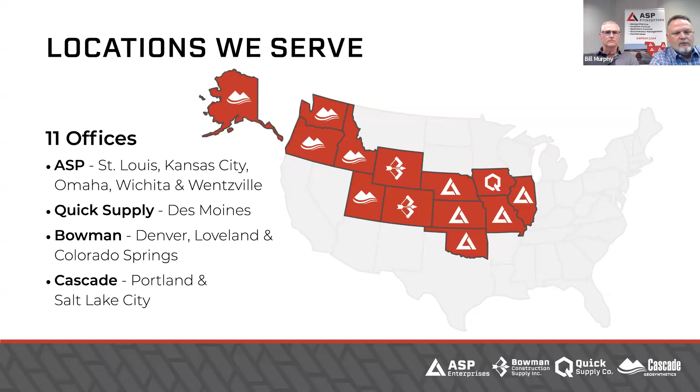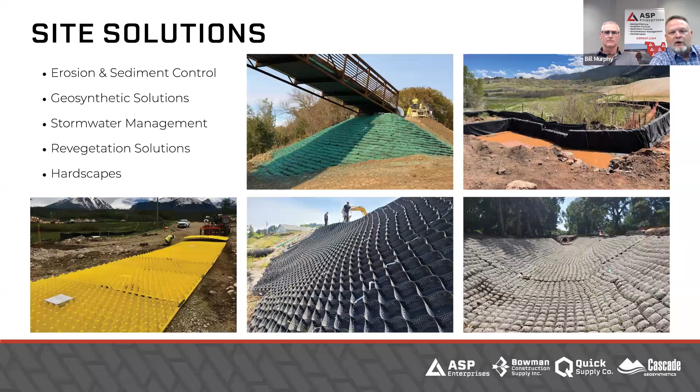A reminder that we do have a tremendous portfolio of solutions available. One of the things I really like to remind people of is the value we add, not only knowing our products and how to use them and where to use them, but knowing how to get them to you. We've had some conversations even this week with my guests, we've already done a couple presentations here in Kansas City.

I'll introduce Joe in a second. But we talked about how we can bring in a truckload of product and keep it in our warehouse or in our yard, depending on what it is. We can strategically, surgically, deliver that to your project right where you need it, when you need it. That takes a lot of the burden off the general contractor or subcontractor, a lot of worry away from the owner that you don't have products sitting there blowing in the wind, getting stolen, or destroyed by bad weather. We just get it where you need it, when you need it.

I'm happy to say we have wonderful people in our warehouses, our inside sales, our drivers. It's been a lot of fun for me over the last 10 years. This is my 10th year now with the company, getting to know a lot of the folks that make our company run. And it wouldn't happen if we didn't have other great trusted partners.

We like to brag that we only deal with the best manufacturers in the world, and we bring the best products. We do a very good job of vetting them before we offer them. So if we offer a solution to you, that means we've already put it through rigorous testing internally, made sure that it's a fit for us. One of the things we like is when we get to know our manufacturers and they come to our markets, or we go see them where they're at, growing those relationships so they understand and get to see a little bit of how we operate.

That's a perfect segue to introduce my guest today, Mr. Joe Kelly from Citygreen. Joe comes to us from Toronto, and he came down to Kansas City yesterday. We already did a couple of lunch and learns and snack and learns, and we're going to have more of those this afternoon and more tomorrow. If you're not one of those people lucky enough to meet Joe in person this week, we can fix that, just reach out to us. We'll set up another time for him to come visit, not just Kansas City, any of our locations. And if not Joe, he's got counterparts, he'll talk about that in a moment.

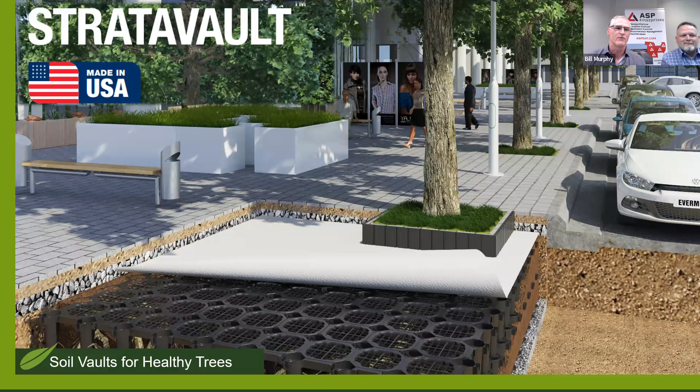Stratavault, you're all probably familiar with it. It's our 6th generation strata soil cell. It is a molded one-piece design, as you're all familiar with. Features and benefits are an abundance. The biggest advantage for the installer is the one-piece design, which is going to install at least twice as fast, if not faster, than our competitors. Ease of mobility, you're going to be transporting more product than air, getting it to site. You're able to carry it from whatever mode of transportation to the pit, to the job site extremely easily because of the way the product nests inside each other. All kinds of features and benefits.

One of the biggest ones, my favorite, is we are made from 100% recycled content, including ocean plastic, which we'll get into a little bit later. And that includes all of our products that are going underground.

I mentioned ocean plastic. We also include ocean plastics in our product, and we're always trying to increase more of that. Believe it or not, it's actually hard to come by, but we're always trying to increase the amount of ocean plastic. Another huge benefit of our Stratavault is the adaptability in the field. Getting it into the pit is one thing, getting it to work around current infrastructure is sometimes another thing. So being adaptable and being able to cut off a leg to make sure that infrastructure can continue on the path it's going, while still providing the structure via the Stratavault, is a huge advantage.

Again, it speeds up that installation time, which keeps that project on time. We talked about ocean plastics, so we have partnered with a company up in British Columbia who is removing plastic from the Pacific and turning it into regrind that we can build our Stratavault out of. We actually are coming out with a specific Stratavault product that we're calling the Ocean Legacy, that has ocean plastic content in that one Stratavault product.

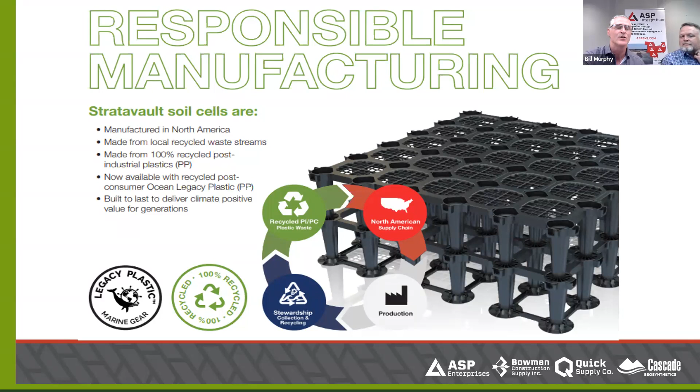As I mentioned, we have the ocean plastic model coming out soon. All of our product is made in North America - actually, all of our product is made in the USA, which is great.

The Stratavault 28 and 30 would be for your walkways, sidewalks, and bike paths. The Stratavault 45 would be for everything else - it has the highest load capacity and gives you a vehicular rating which covers any hardscape surface. So there's essentially not a hardscape surface that we cannot support.

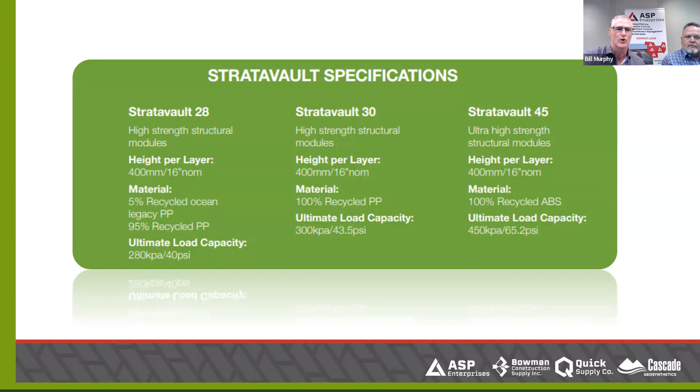So you're able to get a lot more soil, which is what we need for trees. As you all know, if we're planting a tree, we want it to live, to hit maturity and give the canopy coverage it's meant to, rather than just put it in a bunch of rocks and hope it lasts a few years. There's no sense in planting a tree if we know it's not going to make it.

An equation presented to me a little while ago, comparing soil volume from our Stratavault to structural soil, is basically: what type of lung capacity would you want? Would you want 94% lung capacity or 20% lung capacity? That kind of puts it into perspective for the tree - we're giving them 94% lung capacity, or soil capacity, as opposed to just 20.

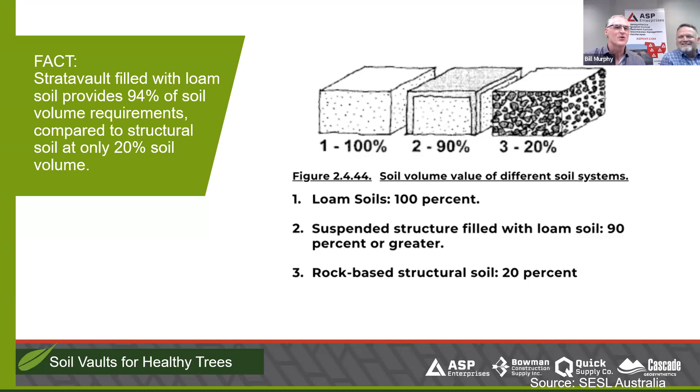I have asthma, so I really appreciate that. It's a good analogy. I haven't seen a tree with a puffer, but it is a good way to analyze things.

As I usually tell people in live presentations, imagine the room we're in - ours is about 40 feet by 20 feet. If this is the amount of soil volume you're looking to achieve, my soil cell matrix would be a little bit bigger than this room, because we're able to supply 94% soil volume within our soil cell.

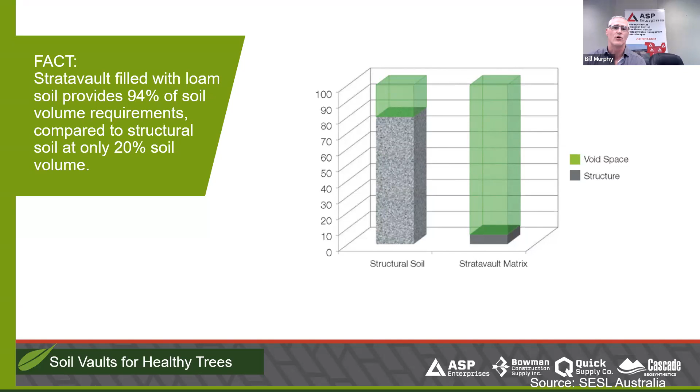To get this size - a 20 by 40 foot room worth of soil - using structural soil, you're going to need to fill up the stadium that Mr. Mahomes is going to be playing in tomorrow to get that type of soil volume. So there's a big, big difference.

And more is always better than less when it comes to soil volume. You can never provide too much. The tree is not going to say no - the tree roots aren't going to say no to it.

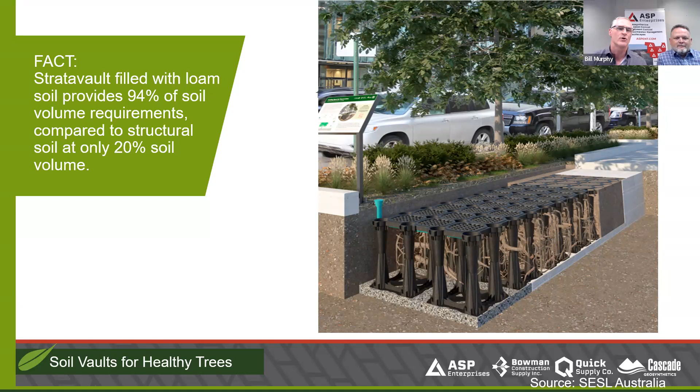Here you see a perfect example of a soil cell matrix. This would be underneath the sidewalk, or it could also be underneath a roadway. You can see how the tree roots, along with the infrastructure, would just work their way around and through the legs of the Stratavault, and you can see our foot plate on the bottom there.

So we talked about infrastructure working its way through - you can see that water pipe there working its way through. We're able to cut away the Stratavault to make sure that the infrastructure can still work down the path it's going. Obviously, trying to move that water main would be a big issue, so it's a lot easier to work our product around that water main pipe. The competitors really can't do that.

They're actually going to have to eliminate their product rather than just cut it away because there's really nothing for them to cut. So by just putting the bridge connector in place and cutting away the next Stratavault, we're able to get as close as we can to that infrastructure and still supply enough of the Stratavault soil cells to support that hardscape and fill up with the soil volume.

As you can see, 95% of our projects have services running through them. It's probably even higher than that, to be quite honest. As you guys know, once shovels hit the ground, we tend to find more things than we thought were going to be there anyway. So 95 is probably on the low side.

So all of our product has a minimum H20 load capacity. And you can see here, we do load testing. We pull about every 75 to 80 off the line and do a load test to make sure we're still hitting the load capacity that we're looking for. So as long as we know what your anticipated load capacity is going to be, we can design a soil cell matrix that's going to accommodate that. So whether you're under a bike path, sidewalk, roadway, or airport runway, there's not a hardscape surface that our product cannot support.

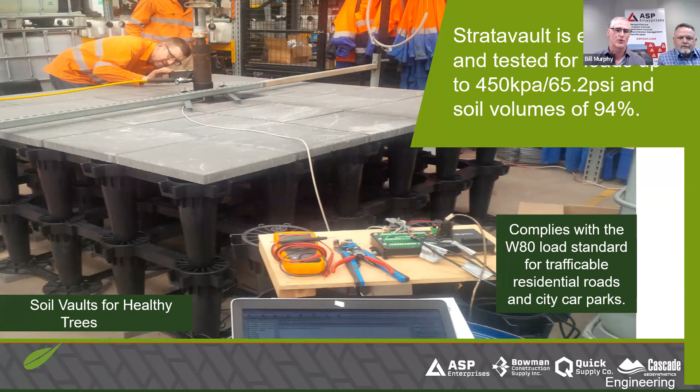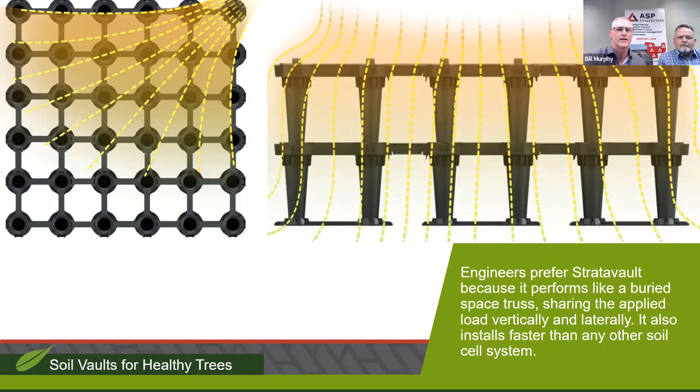It'll be going from this cell to his friends around him to pick up all that load. So it's a shared load. So even with the highest load capacity in the sector that we have, we're not even probably coming close to what our product is capable of holding up. Off to the right there, you just see it again. It's just a shared load, taking that load and just dispersing it down to that compacted base.

So a new product that we have coming out is our side panels. So one of the things that we're able to do for you guys that our competitors can't is we're able to be used as a water tank system. Because our product is a molded one-piece design, it stands up on its own. We don't need the dirt to keep us upright. Our product stands up on its own.

So because of that, we can be used as a water tank system. So rather than filling it with soil, you just wrap it in a liner. In this case, we would have our side panels on it to give it more durability, add more lateral strength to it. And now you can take whatever the anticipated precipitation is, the rainfall for that area for the year, and build your stormwater tank to whatever size you want. And again, because of our multiple foot plates, adaptability and sizing, you're able to build that water tank to pretty much any size that you want.

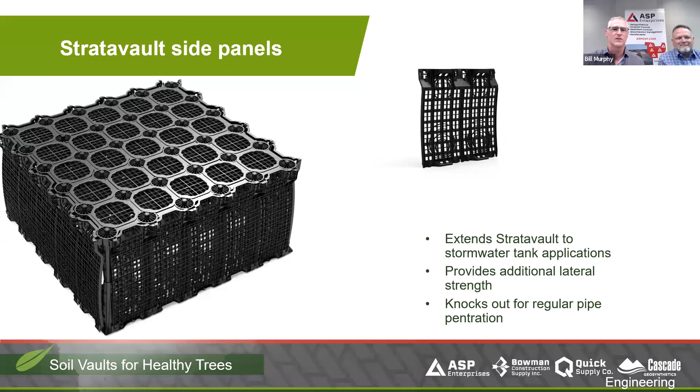Or as I like to, take a quick jab at Bill, whatever the engineers come up with when they're doing their mathematics. And the nice thing is you can build it a little bit bigger and just leave that water in there and slowly disperse it into the stormwater system. So the current system doesn't get overwhelmed when we have these quote unquote 100-year events that are coming, a couple times a year, it seems these days. So great addition to our current family.

Another addition we're bringing out is our Treebit soil sensor. This has been on the board for a little while, and we originally came up with the idea from one of you guys, so thank you very much. It's designed to go into the pit and monitor the moisture content. Especially out of the gate, in the first few years of a tree planting, we want to make sure it's getting the water level and moisture content it needs to be a healthy, happy tree.

The sensors will come in different lengths, 12, 24, up to I believe 35 inches. It's inserted into the pit and is Wi-Fi enabled, so you can have someone sit at their desk and click on to check out exactly what's happening in the various tree pits, making sure we're getting enough moisture into that soil cell matrix to ensure the tree survives.

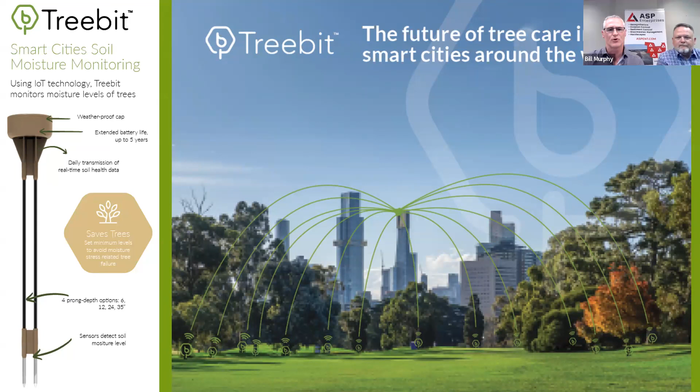Battery life we're anticipating is about 5 years, which is probably more than we actually need. As I said, the first couple of years are the most important for a newly planted tree, especially the first year. So if we can make sure it's getting the moisture it needs, we're off to a great start.

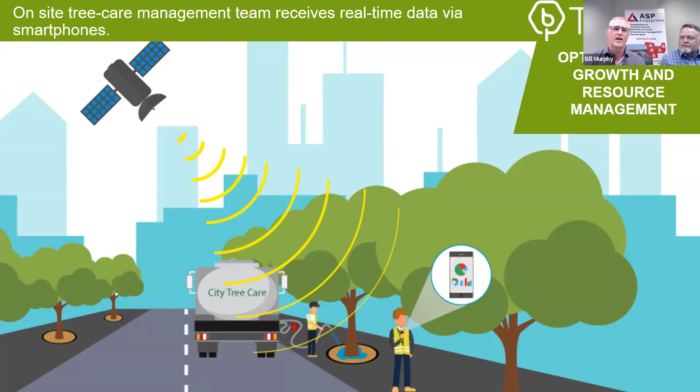A great thing for you guys, and for municipalities and cities, is that one person can pretty much monitor the entire matrix of soil sensors. Whether it's just one or two pits down on an avenue and a couple more elsewhere, or across the entire city, because it's Wi-Fi enabled, it's just a couple of clicks and you're able to monitor whatever tree pit you're looking to.

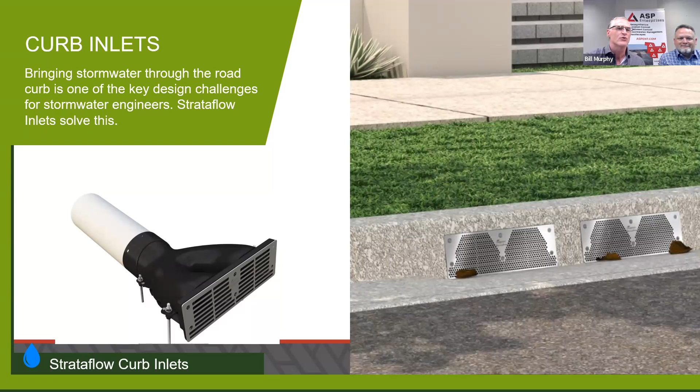A couple of other new products we have coming out are curb inlets. This is another way to capture stormwater, as you can see in the picture. We have the grate on top so we're able to filter out all the stuff we don't want getting in there. Again, the body is made from 100% recycled product, so we're being as earth friendly as possible. You can see how it works here, and as we saw in the picture earlier, we can stack multiple ones side by side for those large rain events.

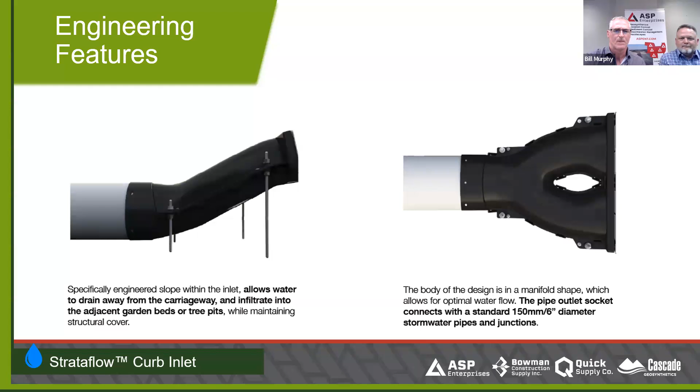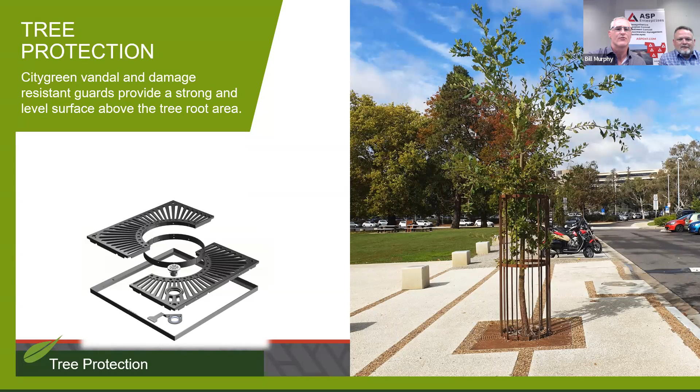As you guys are familiar, we also do tree protection, street furniture if you will. Here we have our tree grates and tree guards, and we have a couple of different ones. One feature we can offer is that our tree grates can be custom made. We actually have a project out in Denver that we did recently where they had to be custom made. So we're able to do that for you, and we have a few different models to make sure we can get you exactly what you're looking for.

Because there's so little soil volume, that tree root system is going to want to maneuver as much as it can to find more soil, nutrients, and water. But because of the 80% rock supporting that hardscape, it's going to be compacted at a 95, 96, 97% compaction rate. So when the tree roots try to maneuver through it looking for more soil, it's going to be difficult because of that heavily compacted rock.

If you're looking to get this much soil volume using structural soil, Mr. Mahomes wouldn't be playing Thursday night because we'd be using that football field to get that much soil volume using structural soil. So the value of our product is certainly there up front once you factor in the amount of soil volume you're going to need either using our product or structural soil. The square foot pricing may be a little bit in their favor out of the gate, but once you factor in the size of the pit they're going to need compared to the much smaller pit we're going to need, that dollar value up front definitely turns to our favor.

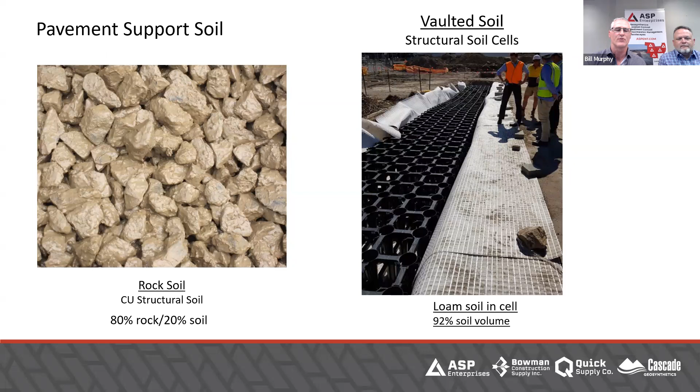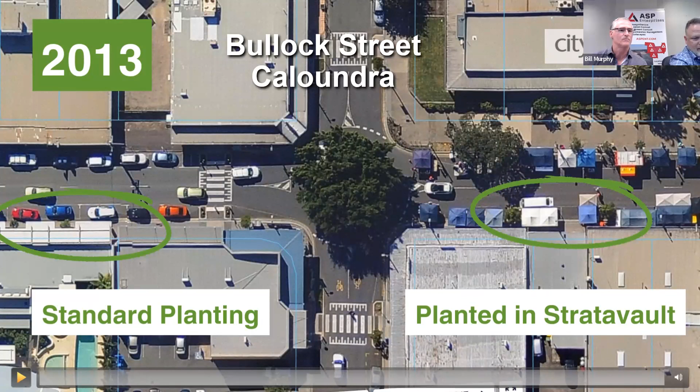And down the road, it's a no-brainer, which we'll show you in this quick video here. I think we need to push play on this one because it doesn't auto play. Are you ready? Yep. By the way, I'm telling you on time, we're not even half hour in. You're doing great, we'll have to do some chatting at the end.

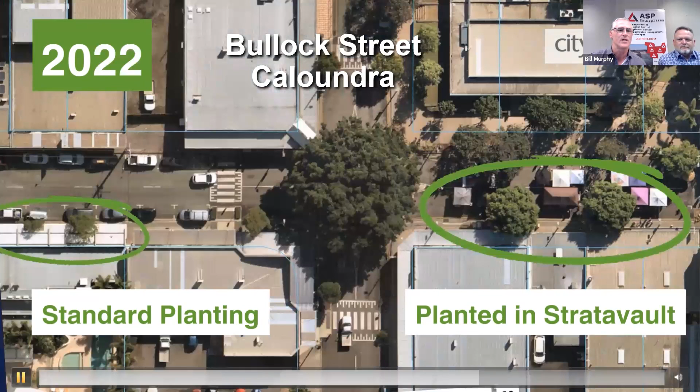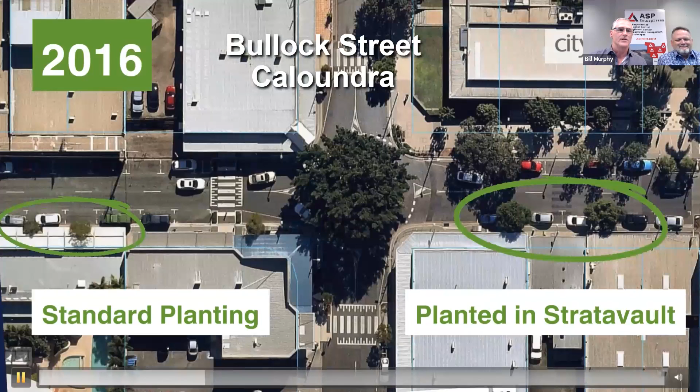You can see the circles here. On the left is standard planting into what we call concrete coffins. Off to the right is planted in Stratavault. You can see during the time lapse, ours is growing nicely, providing a nice mature round canopy, while off to the left there doesn't look like much change. We'll play that again real quick. So you can see they start off identical, and it doesn't take long for the trees planted in the Stratavault, which have plenty of soil volume, to keep growing and growing, whereas the standard planting, just into a square 4x4 concrete coffin of soil, has nowhere near enough soil volume and nutrients, so those trees are stagnant in growth or not growing at all.

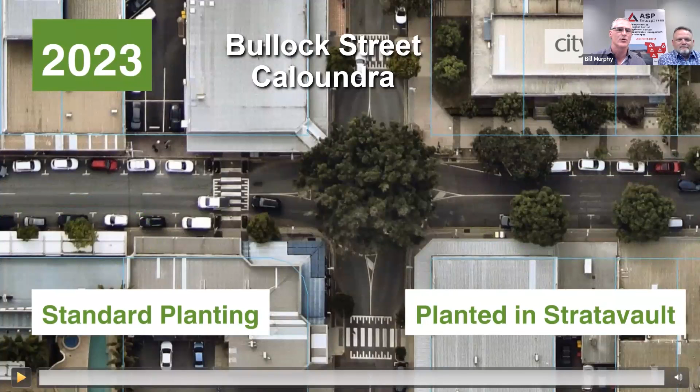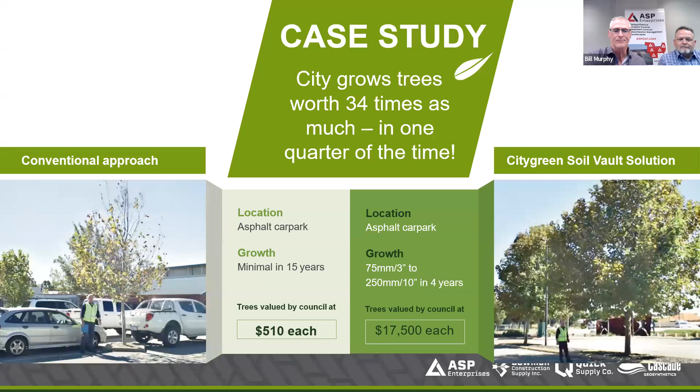To give you an idea of return on investment, we talked about comparing it to structural soil where it comes in our favor, and you can see the difference in that tree's worth. When they come from the nursery the cost is the same, but down the road the difference is going to be significant to say the least. You're looking at a $17,000 difference in value of trees. The one tree that's not doing so well has been there for 15 years, whereas the one in Stratavault, 4 years in, is pretty much doing what we want by providing canopy coverage, and its dollar value is much more than when it first came into play. So the ROI for using soil cells is there up front and also down the road when we look at the trees.

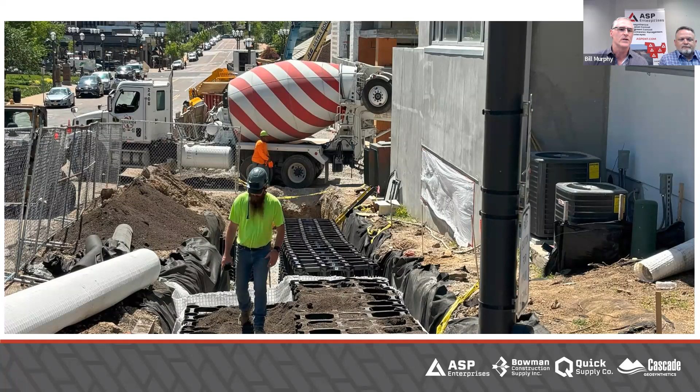And you can also see here too that it was tiered, different levels where that fellow's walking is a little bit lower than the level up beside him. You can see it a little bit better there maybe. And you can see the finished product right here.

So for the people who make the decisions on this, it's not an aesthetic thing that you're going to see day one, like a building where you could put a brick facade or some cool lighting on it and show it off to everybody the very first day. What you're showing off here is going to be in the next 10, 15 years, maybe even 5. We've seen it on some of these slides. You're going to see that impressive tree growth.

So a lot of times when projects are designed, they show a rendering. I mentioned this yesterday, they show a rendering of what this is going to look like someday. Well, landscape architects show developed trees, beautiful trees and shrubs and flowers on their rendering. And then when you build a project, if it's new plantings, they don't look like that yet. So you'd hope they look like that in a few years if everything goes well.

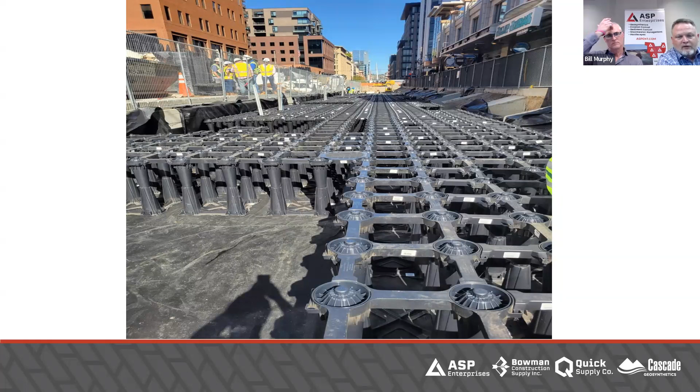And as you can see, you're downtown - there is nowhere to go. This is as built up as any downtown can be. Wherever you're at, whatever city you live in or work in, you can imagine your own places where you would run into this situation.

Utility conflicts have been a tremendous concern, but it's been real easy to accommodate because we have a modular system. If we were stuck with a large rectangular system, we would have to either scrap it, rebuild it, or custom fit it, and it would be a tremendous expense and delay to the project.

They're doing one block at a time down there - actually disturbing more than one block at a time, but trying to phase this as they go. This is where we add value, bringing in containers full of the Stratavault parts, and then strategically delivering only what they need for the number of units they're ready to put in the ground, because there's nowhere to store product on site. There's no big yard next to this - it's not like a big DOT highway project where they have a large staging area for equipment and materials. They only need a straight truck to bring what they need, where they need it.

This is protected by a fence from pedestrian traffic. I have some other pictures we didn't include today - I might flip over and get into some of those. But these businesses are open, and for some of them that's their primary access onto the 16th Street Mall, so they've got to be able to get pedestrians in and out of their facility safely.

And to further Bill's point about being in such a downtown core, congested area with tight spaces to work within - getting the product to the site, whether it's from Bill's warehouse, his yard, or an offsite yard, it's easy to transport because you can use small vehicles.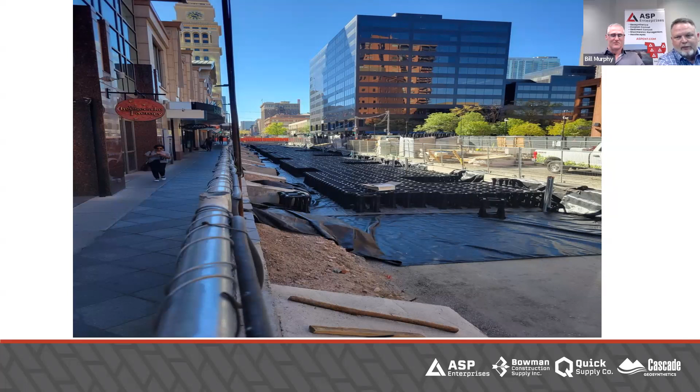That's a good point, Joe, because if you've ever driven downtown Denver, especially now that this project's happening, traffic is a nightmare. It's difficult. It's a lot of one ways. We even have people who live there who don't want to drive down there. That's why they have so many e-bikes.

So here's a place where we talked yesterday during one of the presentations with a landscape architect. We can interconnect these cells where the trees are located, even if they don't continue Stratavault for the entire length of the block for whatever reason. The water can still get transferred in between and can be conveyed through corrugated plastic pipes. So we've got drainage tile through this the full length of the block.

Why does that matter? What we found historically in Denver was some building owners who were responsible for watering their tree did a tremendous job, and others didn't know it was their job and didn't do it. So that sensor we talked about, the tree bit, that'll come into play. But in a place like this, it makes it more fair to every tree to get a chance to survive and thrive versus just one tree that is lucky and has an owner like Joe who's going to do a great job keeping an eye on it, versus an owner like Bill that forgets stuff.

As you see these drainage tiles, they'll either move those out of the way, or if they have to cut them, the water's still going to pass from one tree to the other. This whole system is interconnected, so it's all going to thrive together.

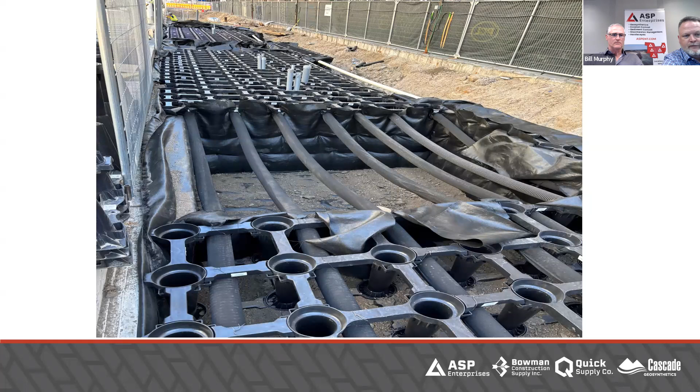This is the last picture we have, and it's a still picture. I took this one this summer during a tour with ASLA, the American Society of Landscape Architects, and I snuck in as a civil engineer. Some friends of mine at Stantec and Dig Studio gave presentations about the early history that came up with the design, even the aesthetic, the way this looks. It looks like a diamondback. This has themes that tie it to the history of Denver and the state of Colorado. There's so much more that you don't see here that I heard on the tour.

Good word, by the way. Yeah, thanks. Modalities. It surprised me. I'm going to write it down, that's my word of the day. I'm going to try to use it this afternoon when we do more presentations.

Anyway, they're delivering stuff and driving on these pavers, and the buses are going to be able to run on these pavers. So they had to make sure our system was designed for a runaway truck or a bus. What happens if they get out of the area they're supposed to be in because this is so open and free? Well, the Stratavault units themselves had to be designed to handle bus load above them with the permeable pavers, and so did the tree grates, and that was a tremendous deal.